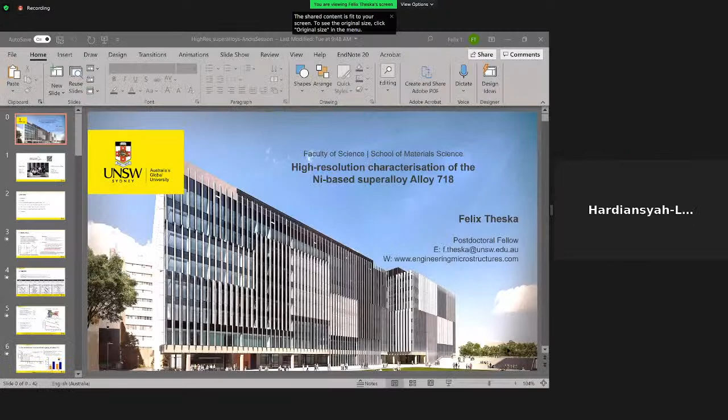Thank you very much for the introduction. Let me just maximize these slides. I hope everyone can see the right view. Yes. Great, thank you very much. At this point, I also want to thank Andy Sohandy and Dr. Annie Sugiarti, who invited me and organized this talk. I very much appreciate this.

My slides are about the high-resolution characterization of the nickel-based superalloy alloy 718. That's pretty much an overview of the work I used to do here at the University of New South Wales in Sydney as part of the engineering microstructures group of Dr. Sophie Primig. We're working on one hand side with superalloys, so I'm part of this research group where we look into alloy 718, Rene 41 and Udimet alloys.

On the other hand side, we're working on additive manufacturing of titanium alloys, also superalloys in different grades of steels. I want to start with a motivation slide, give a brief outline, followed by sections 3 to 6, which are basically 4 papers that came out of my research studies. So these results have been published, and if anyone wants to look them up, you can find them online later, and then close the presentation with a summary slide to wrap it up.

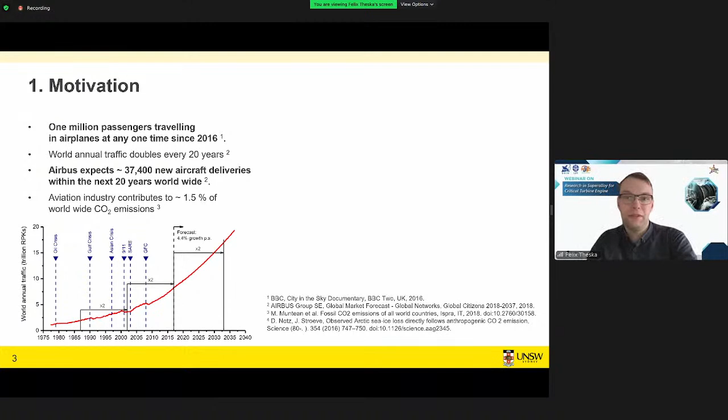At the current time, the aviation industry contributes about 1.5% of worldwide carbon dioxide emissions, and this comes with challenges. For example, new records have been broken with aircraft range, but we don't want to travel equally longer, so airplanes need to fly faster.

The sector relies heavily on fossil fuels, which are very limited, so we need to deal more efficiently with them. And as we emit carbon dioxide, sea ice is usually lost, so there have been studies on that as well.

There are a few approaches to tackle these challenges. One would be to make the aircraft lighter using lighter materials, but we also need to create more efficient aircraft engines, and we can go the way of developing completely new alloys.

But because these are aircraft materials, they need very long accreditation processes. If we start a new alloy this year, it would take up to 10 or 15 years until it can be used.

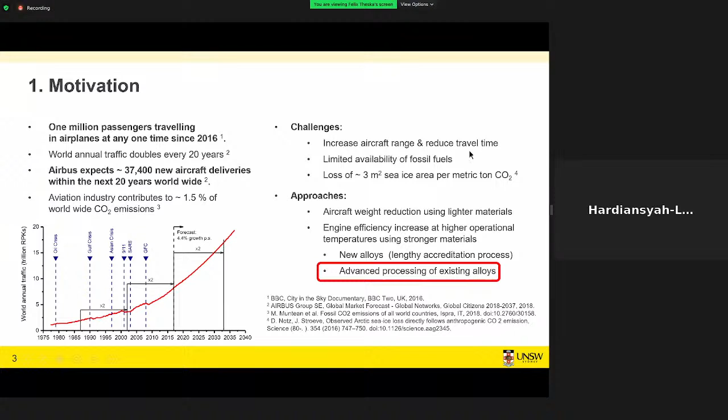A more streamlined approach would be the advanced processing of existing alloys that are already well established, such as alloy 718. That's a polycrystalline and precipitation hardened nickel-iron based superalloy, found in the turbine discs, in the high pressure and low pressure sections of aircraft engines or even gas turbines.

Looking into the microstructure of this alloy, you find a face-centered cubic gamma matrix. We find delta phase platelets that are rich in niobium, usually a couple of micrometers in size, so fairly large, decorating the grain boundaries. Most importantly, we find two types of nanometer size precipitates: gamma prime, rich in aluminium and titanium, and gamma double prime, rich in niobium. The gamma double prime precipitates contribute a major part of the strength for this alloy.

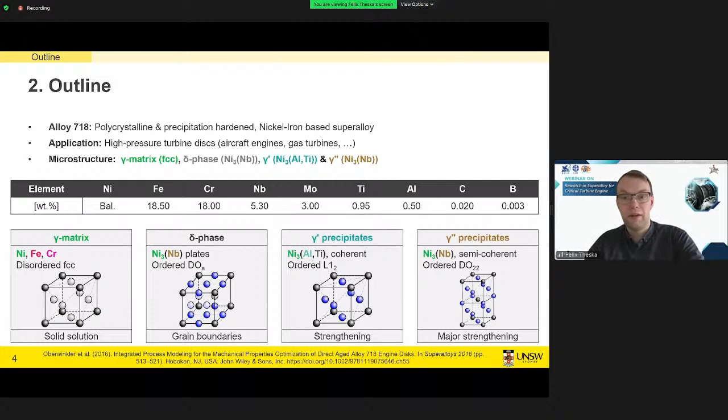We have the intrinsic yield strength, we get some grain boundary strengthening from the Hall-Petch relationship, we get some solid solution strengthening and work hardening, but most importantly precipitation strengthening, which contributes about 44% of the yield strength.

To narrow it down further, my work was mostly on direct aging of this alloy, and there have been some previous studies. This process is not completely new. What's been shown is that the yield strength can be increased by 10% just through using this different process, while having equivalent creep and low cycle fatigue resistance, so there are no major trade-offs when using this process.

What we also know already is that the delta phase volume fraction is lower and we have a higher dislocation density. When we look at the temperature range of conventionally high strength 718 compared to direct aging of 718, we find quite a major improvement.

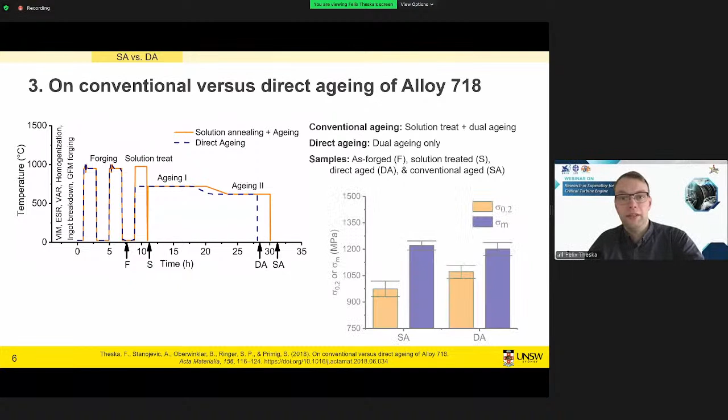Great news, we could actually reproduce this increase in yield strength as well as ultimate tensile strength. But if we also look at this time-temperature schedule, we see the overall process is shorter and makes the manufacturing of turbine discs more economical.

Starting with the grain size, I used EBSD and electron microscopy to have a look at it, and we see that after direct aging, the grain size remains very small, whereas after conventional aging, we find some selective grain growth occurring here and there.

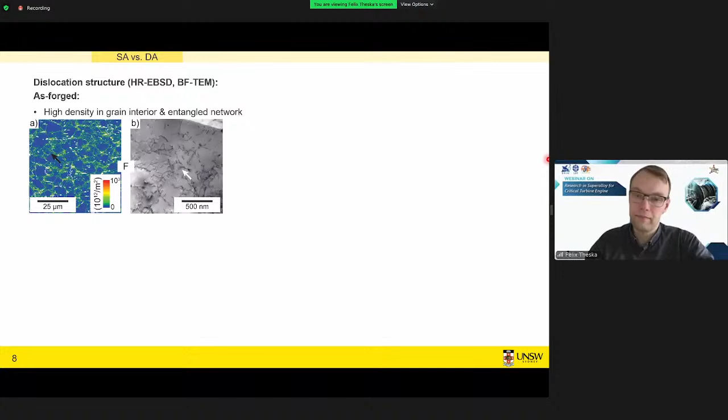What's difficult with the TEM is to distinguish between these two types of precipitates, gamma prime and gamma double prime. Here the Atom Probe helps us a great deal, because we can separate them based on their individual chemistries.

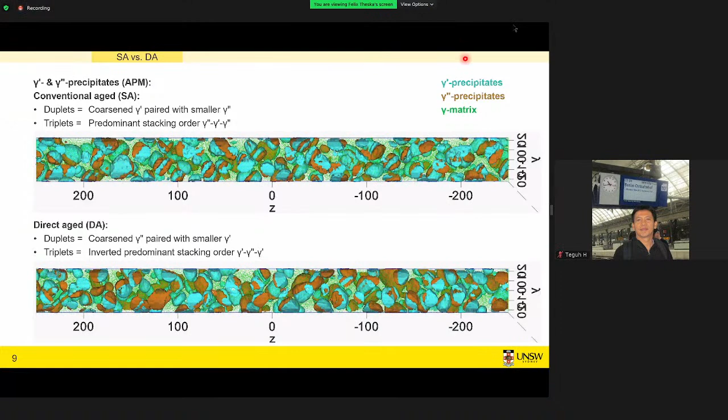If I move on the top hand side, we see a conventionally processed alloy, which is solution treated and aged. As we let it rotate, we see that these 2-nanometer scaled particles actually occur together, so we see a gamma prime and gamma double prime sit together.

And if we look in more detail at, for example, the duplets and triplets, we find that gamma prime likes to sit in the center of these particles, or forms the larger part.

On the other side, the direct age material looks very similar. Again, we find these particles sitting together, but if we look closer in more detail, we find that now gamma double prime likes to sit in the center, or forms the larger part of these particles.

The highlights should pop up. Yeah, as you can see here, these triplets, and here the duplets.

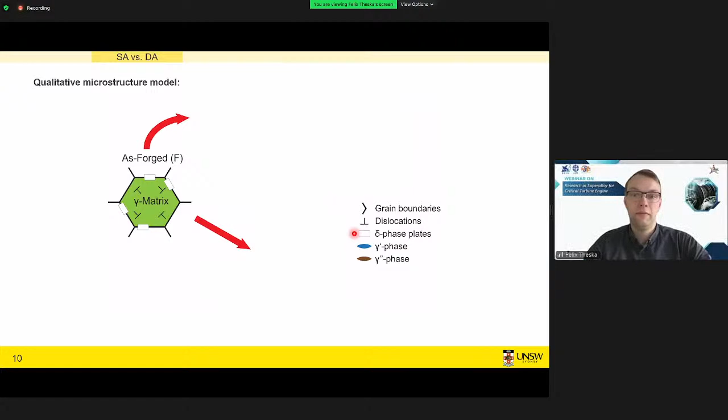Okay, now we already have some insights that this different processing actually changes the structure of these precipitates, and we can summarize what we found out in this sketch of a microstructural model, where we start in the as-forged condition, where the matrix contains high dislocation density and very little delta phase.

If we do a solution treatment to the material, we increase the delta phase, which is rich in niobium, so it takes niobium from the gamma matrix, but we also annihilate some dislocations. This condition favors the gamma prime precipitation, where we find it as the center particle or the larger particle.

On the other hand, during direct aging, we retain the high dislocation density and a lot of niobium in the matrix, which favors the gamma double prime precipitation. So we find this phase as the center particle or the larger particle.

If we combine this together with the smaller grain size, a higher dislocation density, more niobium in solid solution, plus these changed co-precipitates, we find there are contributions to this increased yield strength from all four factors.

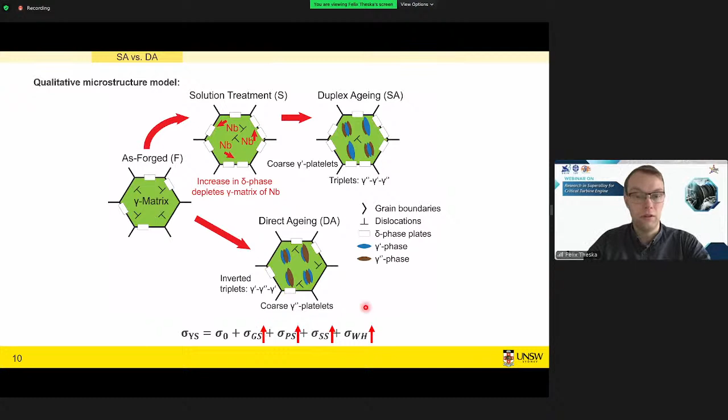Okay, so the next part will be about the Atom Probe microscopy, how we get more quantitative results. I just want to use this as a short introduction to the method, just to touch base with everyone, so that we know the fundamentals of how it works.

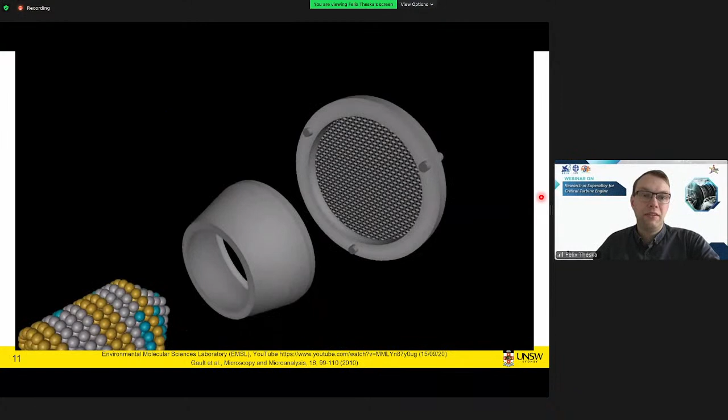So in this nice animation, we see we need a very sharp needle-shaped specimen, which is placed in front of an ion lens or local electrode. After this local electrode, we have a 2D detector. Then we can detach individual atoms by laser or voltage pulsing, and these atoms are ionized and then accelerated towards the detector screen.

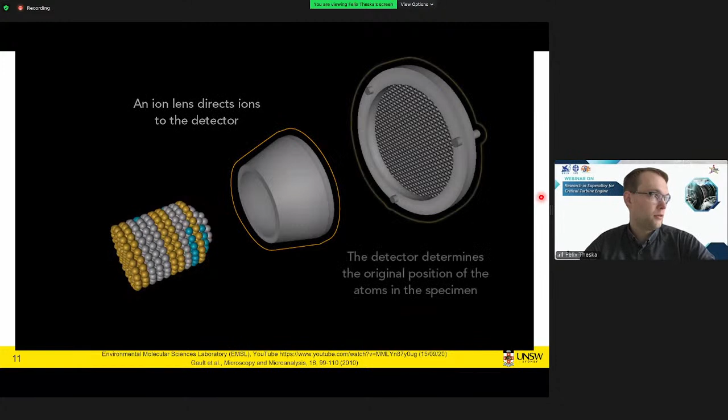So from this, we will get a two-dimensional map, X and Y, where our ions used to sit in the material. And if we record the ion sequence, basically where does the first or the 100th atom sit, we can also reconstruct the Z coordinate.

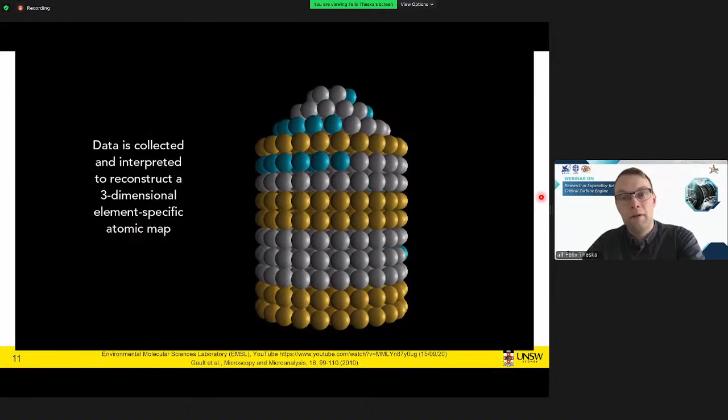Now you can see, because we pulse and then we can measure the time of flight, we also have a mass spectrum in the Atom Probe, which is very convenient because not only do we get the X, Y, and Z coordinates, but also the type of element where it used to sit. And then we get these very nice three-dimensional atom maps.

Okay, so this is just a sketch of what we just have seen in case the animation wouldn't work. How we get these very sharp needle samples...

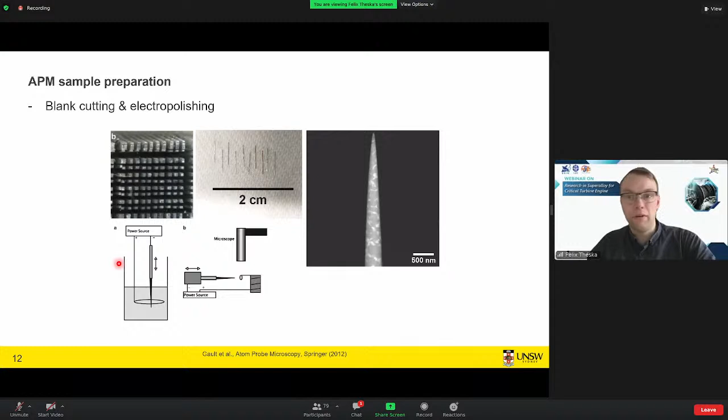...is quite well established. For example, for these bulk samples, we would start slicing them and then cutting them into smaller rods, as you can see on the left-hand side, and then electropolishing them, such as on the bottom side. That's done with these rods placed through a micro loop with an electrolyte. And if we electropolish long enough, they will approach a tip shape, which is indeed very sharp, as you can see in this SEM image.

Okay. Now I said we get the X, Y, and Z coordinates, but the coordinates we record are not necessarily the actual coordinates. So there's a fair bit of reconstruction necessary to get to the true coordinates, or as close as possible.

And the two main reconstruction parameters: on one hand, the image compression factor. For example, if we know features in our data set, in their location, such as some crystallographic information, and they do not overlay with the actually observed location, we can correct this. And that's just done by this rather simple ratio.

On the other hand, we have the so-called field reduction factor. And that's a bit more complicated because it depends on the specimen geometry and the resulting electric field. Often the exact specimen geometry is not known, so we can only approach this factor as close as possible. But that's then calculated from the voltage, the tip radius approximation, and the measured electric field.

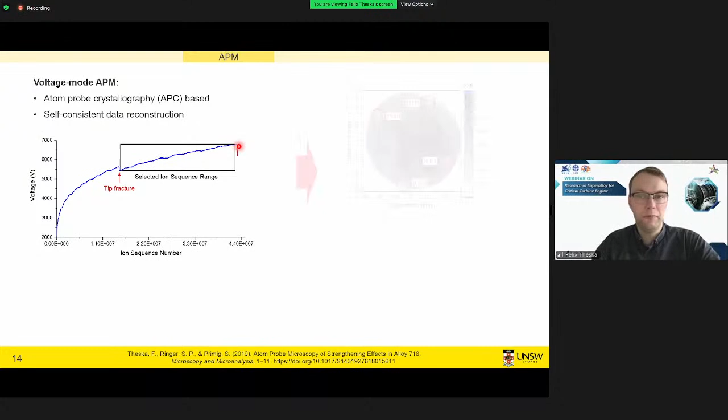So we avoid any tip fracture and then have a look what the detector has seen. Remember, that's this two-dimensional detector, and we see there's some regions that give us less signal. Sometimes that can be crystallographic regions, like in this case.

We then have a look at the mass spectrum and can assign each peak an element. Once we have calibrated these reconstructions, we get these very nice 3D element maps.

Okay, so that's quite nice for the voltage Atom Probe microscopy, but the problem is here we usually need a quite high voltage, which means there's a high risk of fracturing our sample. And when the tip fractures, the experiment is over, and that's all the data we get. We need to make a new sample.

If we want to quantify these precipitates, we need relatively large volumes so we get some good particle statistics. And here we can use laser Atom Probe microscopy, where instead of voltage pulsing, we pulse a laser, which requires a lower voltage and therefore less risk of tip fracture.

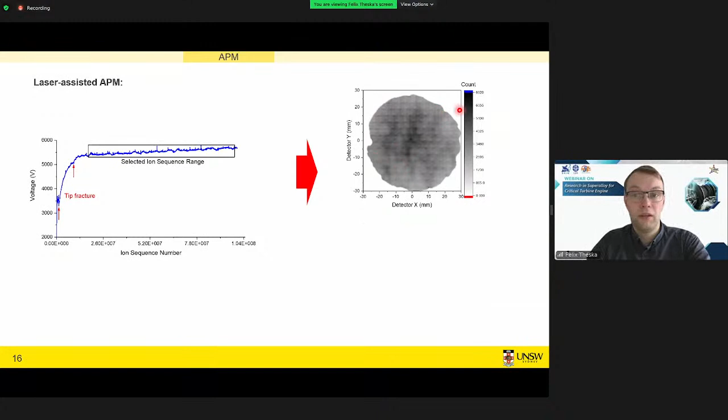So again, we see a voltage curve like this, we get more ions. But if we look at the detector map, we see that these crystallographic features have disappeared. That's quite typical for this. The mass spectrum has changed a little as well, but we still can assign all our elements without any problems.

But we still don't know what are our correct reconstruction parameters. So we need to find a way to do this.

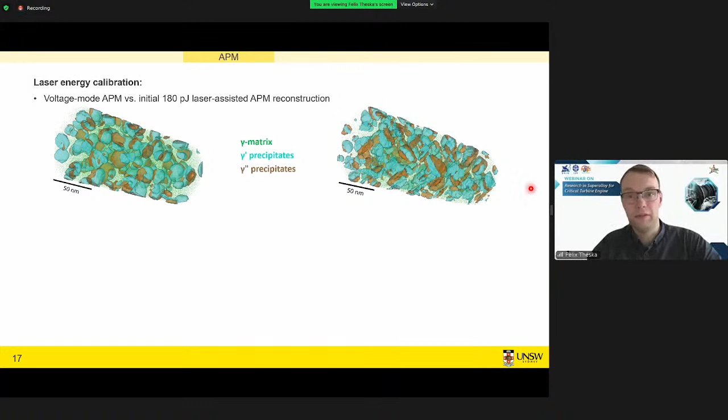Just a short slide on the laser energy. We cannot use any type of laser energy. As you see on the left-hand side, a voltage mode, and on the right-hand side, a very high laser energy. If we go too far with the laser, we may even distort the resulting data, which is then not useful anymore. What we did here was look at the mass resolution and different charge states to calibrate the laser energy, and then could use 50 picojoules for this material and this microscope design.

Let's move on to the reconstruction parameter calibration. This slide shows basically how we use the precipitate morphology. We start with a voltage mode data set where we can see these gamma prime, gamma double prime precipitates. They have a certain shape, extent in X, Y, and Z. Then we can give the relative spatial extent of X, Y, and Z to each other. And as we play around with the reconstruction parameters, we see that we can either stretch or compress these particles.

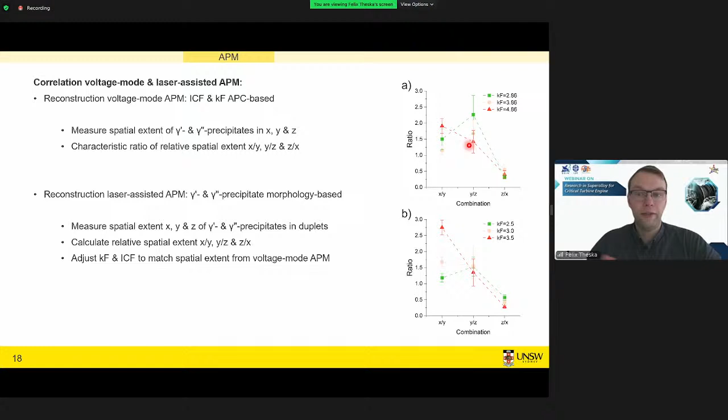And because it's the voltage mode calibrated data, we know what is the correct shape of these particles. Now we can take our laser-assisted data and do the same. We play around with the reconstruction parameters until our relative particle shape fits that of the voltage mode. In this case, I put some red boxes here for the appropriate reconstruction parameters, and you see these relative sizes of the particles are very similar to each other.

Now we have reconstructed our data. The next challenge is how do we represent these particles? Because what we see is usually just points of each atom. What we see here in these brown and turquoise surfaces are so-called isosurfaces.

And basically we can do with them whatever we want. We can set them to, for example, 10 atomic percent niobium. Anything above this value will be enclosed by this surface. But how do we know that this value is correct? Because if we make it larger or smaller, we can also make the particles appear larger and smaller, which is of course difficult if we want to have an accurate size of them.

What we can start with is we look at fully captured particles, such as here. We just chose a random isosurface. We just want to know where are these particles. So we plot them here, and then we put a region of interest. This is a cylinder which goes right through the duplet particle. And then we can plot a concentration profile.

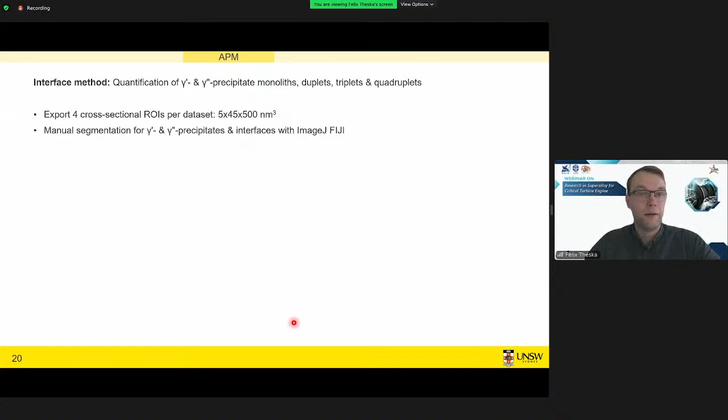So we have reconstructed our data. We now can represent these particles reliably, now we can start doing some quantitative analysis of these atom probe data. For example, in this figure A, we see the side view of a three-dimensional data set, and that's quite difficult to analyze if we want to know how these co-precipitates are stacked together.

What we can do to make it a bit more simple is take some cross sections. We just cut a slice out of our data and then start segmenting what's gamma prime, what's gamma double prime. So we get a much simpler map as in figure B. Once we've done this, we can start counting what are single particles or monoliths, what are duplet particles where two sit together, what are triplet particles or even quadruplet particles.

And once we're done with this counting, we can compare them. You see in these different colors, we have these different morphologies sitting together. What we have observed before is basically represented here again, where SA represents our conventional processing, where we have much more of these triplets with gamma prime as the center, and DA, after direct aging, we actually do have more triplets with gamma double prime in the center.

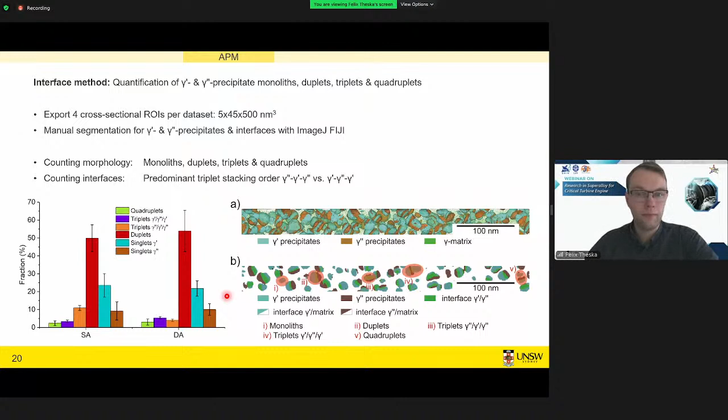Now that we have developed a toolbox to analyze these particles, we can apply this to look into actual turbine disks. What you see here is a result for the cross section of a turbine—a slice taken out of a turbine disk.

If we focus on this middle section, we find some yield strength anomalies, mostly in this middle region where it's very low. We can reproduce this with hardness mapping—I used Vickers hardness 10 in this case.

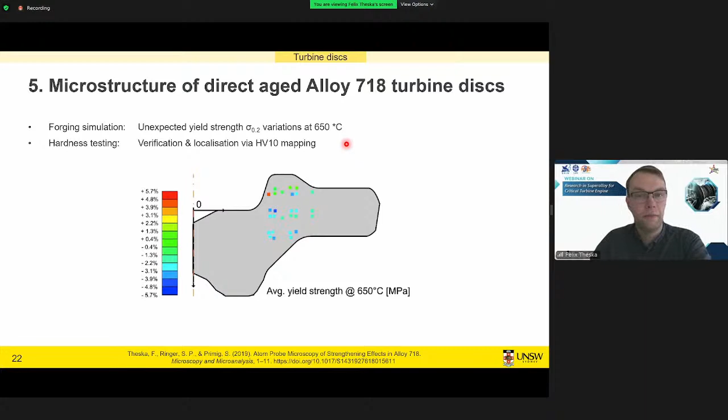Looking at the macro-etched images, we find elongated grain flow in the high hardness region and curved grain flow in the low hardness region. Taking these samples into the light optical microscope, the low hardness region also shows larger grain size in some areas. Using the electron microscope with EBSD, we confirm this larger grain size.

However, this grain size difference is not enough to account for the observed differences in strength, so there must be more going on. The delta phase fraction is already low because these are directly aged turbine disks, but in the low hardness regions we find even lower delta phase fractions, looking at these bright platelets.

In addition, we can plot our geometrically necessary dislocations again, and we find that these larger grains contain much less dislocations.

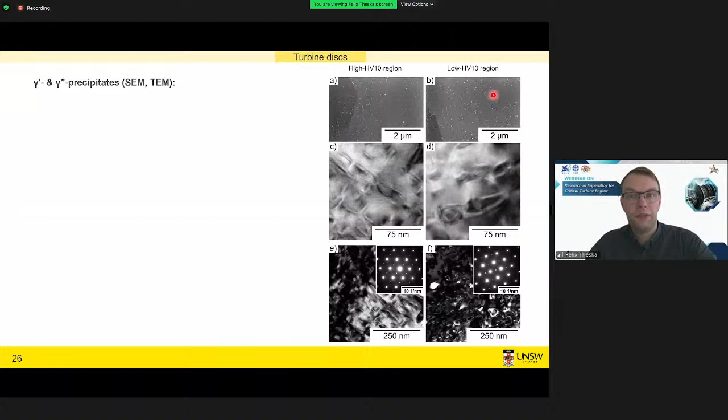If we go to higher resolution techniques, we can use the SEM, set it up carefully, and find the precipitate structures. But it's easier with the TEM to find differences, because we see in both the bright field and dark field that there seems to be a lower density of these precipitates in the low hardness region, whereas precipitates in the high hardness region are quite densely arranged.

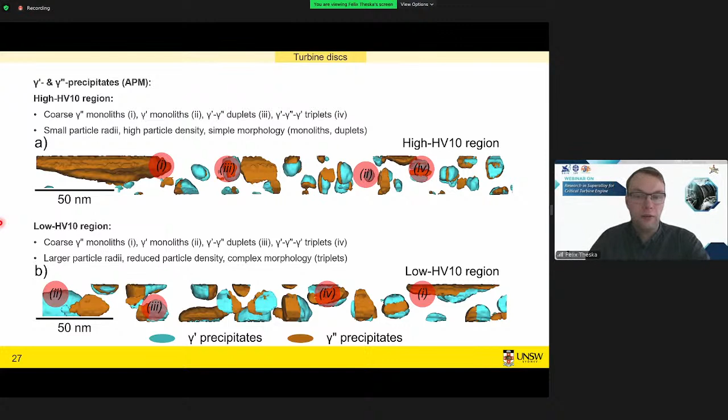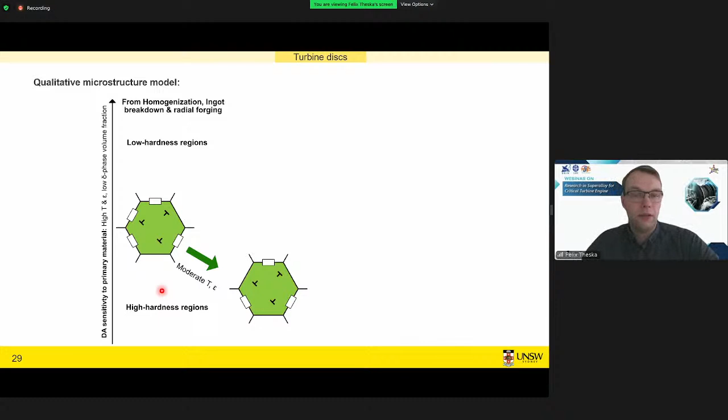These turbine disks are really complex, so the local temperature and local strain induced can vary significantly. In this case, the high hardness region experienced a moderate temperature as well as a moderate strain, so not much has changed in this case.

We retain the high dislocation density and the delta phase volume fraction, which is in favor of a very fine distribution of our precipitates. I call this a stable direct aging in this case.

Now our low hardness regions correlate with a high temperature and high strain. What this can do is actually dissolve some of the delta phase, which would result in a lower volume fraction. But if the delta phase is dissolved, this means we have more niobium in solid solution and less dislocations as well.

So we have this grain growth occurring, more niobium, less dislocations. And that's in favor of more widely spread precipitation. I call this unstable direct aging for the reason that there's less nucleation sites and the growth is very much accelerated due to more niobium.

All right, now to the last chapter, where we can use all this knowledge we have acquired before to study the early stages of precipitation during direct aging in this alloy.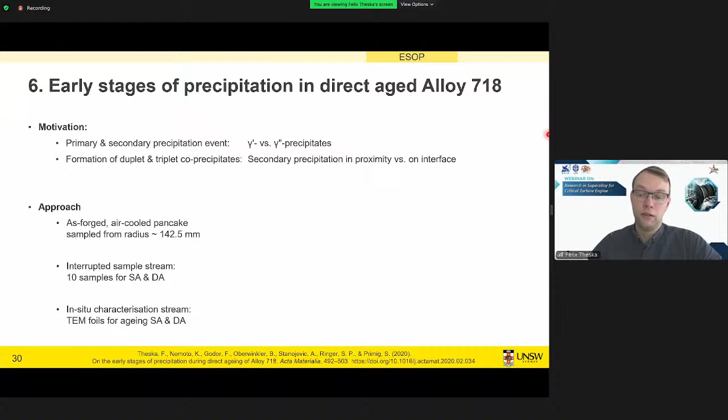In our approach, we took the same material from an industrial forged, not disc, but an industrially forged material that has been air-cooled, and then created an interrupted direct aging sample stream.

What we can do with these samples once we have heat treated them is do some hardness testing. As you see here, over the direct aging time, the hardness profile roughly fits to an exponential growth function. We do see some outliers after 2 hours, then in the transition, as well as in Ageing II.

But to really understand how these initial stages of the precipitates form, we selected these samples highlighted by the black arrows: the as-forged, 0.2 hours, 0.6 hours direct aged, and then fully aged.

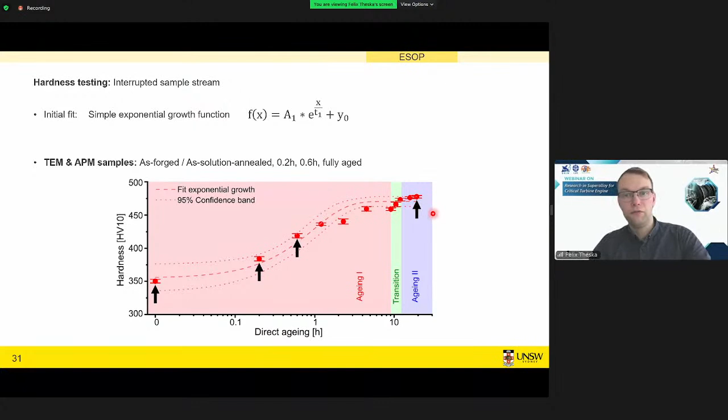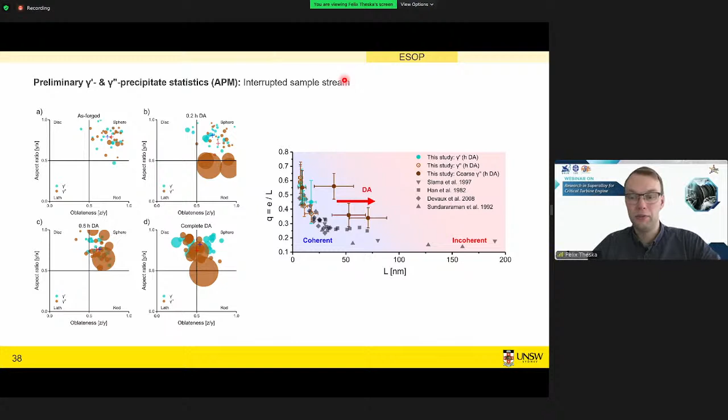Now we can adapt our microstructural model even further. We start with the air cooling after the forging, where along these dislocations we have a high attraction of niobium, whereas aluminum and titanium, in this study, we have not observed a similar trend. So at least for niobium, the diffusivity along dislocations seems to be greatly accelerated.

What this means is we have these gamma double prime particles forming along the dislocations and then growing quite rapidly, whereas the population of smaller particles, they grow much slower within the matrix.

After 36 minutes of aging, all populations start growing, and during the time from 0.6 hours direct aging until the final aging step, we observe this formation of co-precipitates.

If we consider the change of the chemistry, we see that gamma double prime takes niobium from the matrix, but gives back aluminum and titanium. And this favors the precipitation of gamma prime on the interface of the gamma double prime particles.

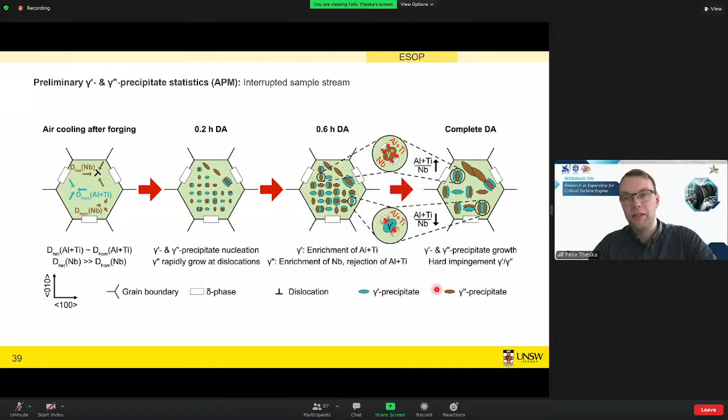Now let me move on to the summary, just to wrap up what we have observed. In the first study, we have observed the interaction between the delta phase and gamma double prime precipitates through the niobium concentration. We also have observed that the dislocation density plays a very important role.

With our Atom Probe microscopy toolbox, we could find ways to calibrate large data sets and quantify our co-precipitate morphologies, which we then can use to quantify data in turbine disks. These are incredibly complex because we have a lot of factors during the manufacturing in the microstructure playing together.

But we can also quantify our early stages of precipitation, where we have observed homogeneous and heterogeneous nucleation. And we found that the secondary nucleation is favored by the change of the local chemistry.

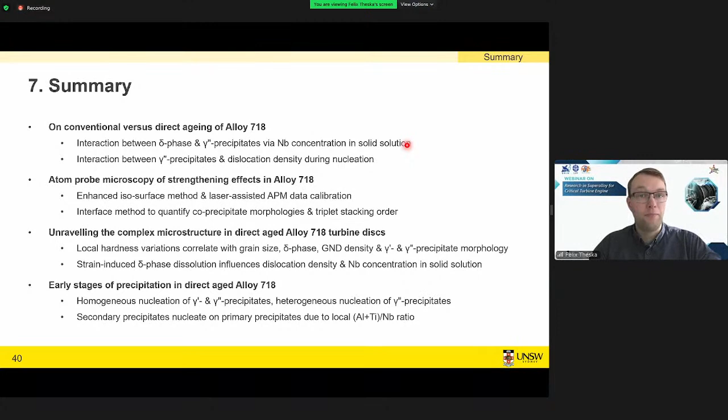So that's been my work in our group.

Last but not least, I want to thank Microscopy Australia, our friends at Sydney Uni, and our industry partner, voestalpine. They need to be acknowledged as well for their expertise and the material they provided. I thank you for your attention, and I'm happy to take any questions.

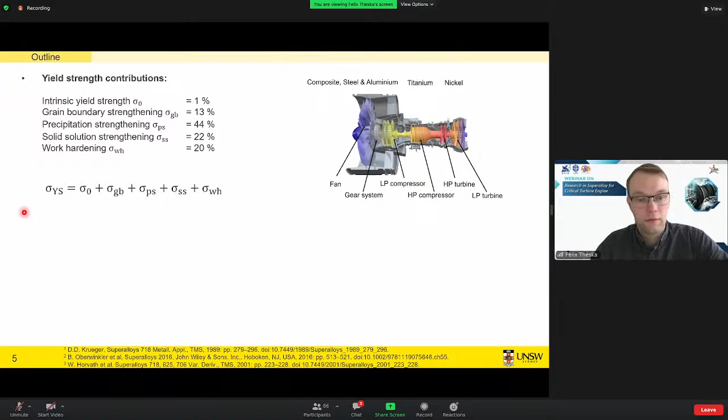I was about to ask you what is the volume fraction between this L12 structure and then DO22. And in the last few slides, you showed that after heat treatment, let's say after the early stage and then after 10 hours, the volume fraction changed quite considerably, in which the volume fraction of DO22 is much larger.

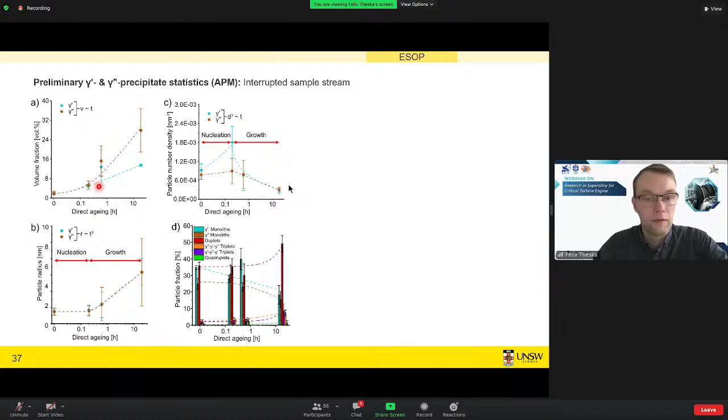So does it mean if you prolong this material for long heat treatment, like 1000 hours in service, the volume fraction will change?

Also, DO22 is much higher than L12 structure? So does it mean that DO22 is more stable than L12 structure? So the second question, I would like to know if there is a mechanism of transition from L12 structure to DO22, some transition of the structure from L12 to DO22.

And then the last question, maybe, the atomic composition of the niobium is quite small, so how can we have this much DO22 volume fraction? If you remove this niobium, like half or even totally remove niobium, what will the mechanical properties of this material be? So you can only have L12 structure without any DO22 or delta phase, which, I saw from the presentation, the main constitution is niobium.

Okay, that's all. Thank you so much.

Sure, please remind me if I miss any part of the questions. So the first one is the stability of the DO22, which is the gamma double prime. Yes, gamma double prime, and that's actually less stable than the L12. It provides a lot of strength for temperatures up to 650, 700 degrees centigrade.

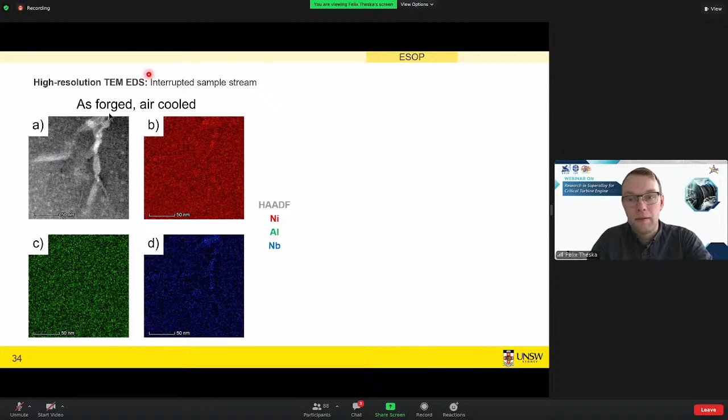You showed us slide number 34. Could you show it to us again? You mentioned that's a high resolution TEM image, right? And you can get the atomic, nanoscale structure. So I'm just curious, you set the G factor by the TEM, right? In this case, the direction of the diffraction patterns in B and D for the gamma prime, is it...

It shows the difference between as-forged and direct aging in a very short time, only 0.6 hours. But if you also see the precipitations and dislocation density, in the next slide perhaps the structure is also similar. Does that mean the direct aging, because of the very short time... And how did you prepare the samples? I'm worried that if you prepare by FIB, there could be contamination that affects the precipitation in your structure.

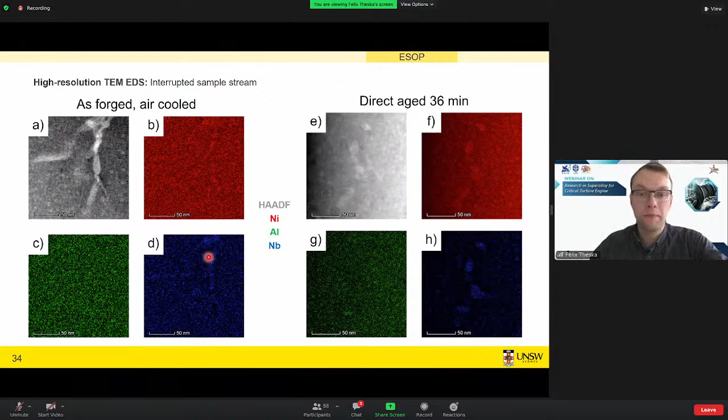Yes, so maybe I'll start with sample preparation, because that was one of our concerns too. All these atom probe samples and TEM samples have been electropolished. You grind a very thin foil, make it a disc, and then electropolish it, so you have no contamination from the FIB and no deformation left over from any grinding steps. The challenge is getting samples suitable for this high resolution TEM. It took me a bunch of attempts to get a very, very thin sample, so you need a couple of attempts to get good enough samples.

The first question, I think I missed the first part. That's because I saw the structure is quite similar, right, as the forged and direct aging only in 0.6 hours. Is that because of the very short time? Because the G factor, if we see in the diffraction pattern in figure B and D, this is also similar. Yes.

So what we can show here is that we indeed already have precipitates in the as-forged condition, which then grow very quickly. Because if we just look at the atom probe, it might be just some accumulation of niobium, which might not be ordered, which wouldn't be a precipitate. But here we can show they are already ordered like they are later, after 0.6 hours, which makes them precipitating particles.

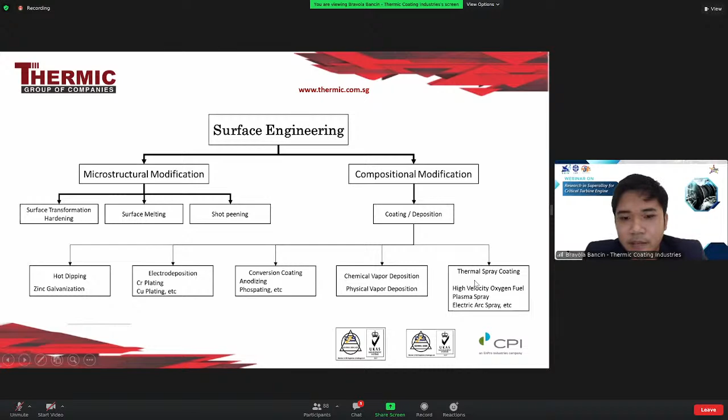And then what is thermal spraying? Thermal spraying is a group of coating processes in which material is deposited onto a variety of components. This is the material, the feedstock. The form can be wire, powder, or rod, and the type of material can be ceramics, metal, alloys, carbides, and many others. The material gets heated by electrical means or by combustion, and then the gas will spray the melted material onto the surface to be coated.

That's the principle of thermal spraying. These are microstructure examples of the thermal spraying process. This is a cold process with virtually no heat input to the substrate, a mechanical bonding process. It's just mechanical, not metallurgical like welding.

We can spray many materials, and the thickness is typically 100 to 750 microns, but can be more.

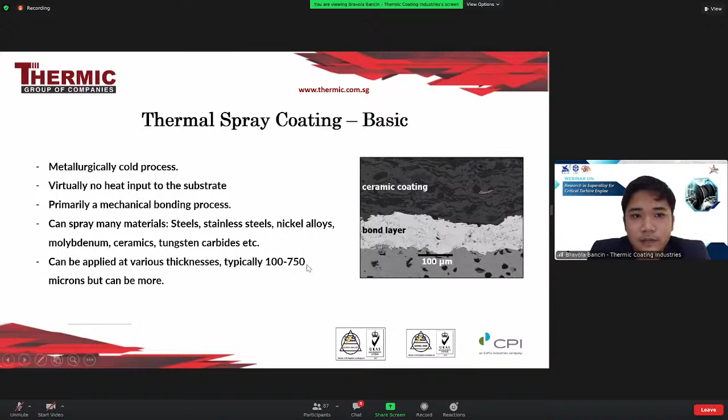This is the thermal spray coating advantage: it provides resistance to wear, erosion, cavitation, corrosion against corrosion under insulation, and abrasion or heat, and many more that can extend the life of new components.

This process coats the material so it can improve or restore worn components like this blade. We can extend the life of the blade.

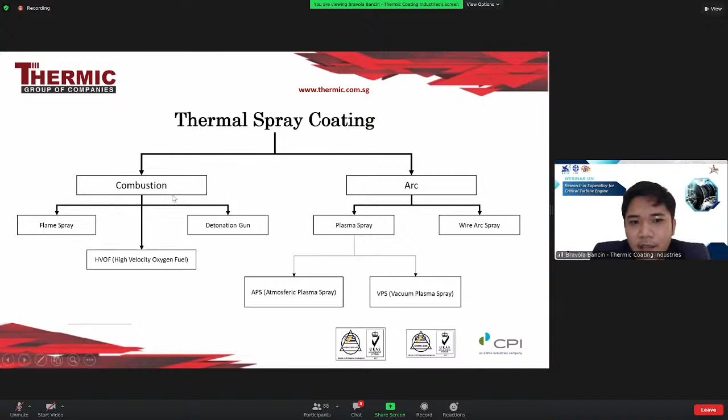This is HVOF coating. What is HVOF? HVOF is high velocity oxygen fuel. We can see this is the principle of the HVOF process.

Oxygen, fuel gas - HVOF can use liquid fuel or gas. In our workshop we use propane in the form of gas. The spray motion of HVOF, high velocity oxygen fuel, is very supersonic speed. In the motion, diamond shock waves can form because of the resonance of spraying speed onto the component, the workpiece.

This is a kind of feed material for HVOF using powder, very, very fine powder.

This is some materials that can be applied by HVOF coating. We can see here nickel-based superalloy powder similar to Inconel alloys like Inconel 625, Inconel 718, and similar to Rene 80. The powder size is typically around 5 to 60 micrometers with spheroidal morphology. Another material is tungsten carbide. These two kinds of material are commonly used in our workshop, very common to be applied to our customer parts.

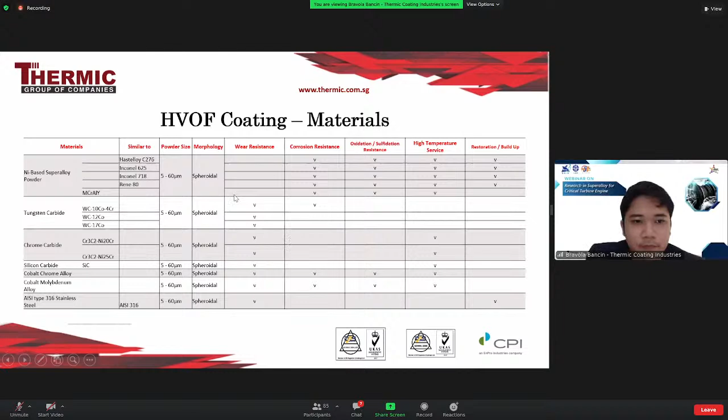The powder is deposited to the substrate, and the particle velocity is up to 700 meters per second, more than the speed of sound. And the bond strength of HVOF is the highest

The coating thickness typically for HVOF is up to 2.5 millimeters, but sometimes we just apply the HVOF in our workshop up to 500 microns because it is enough for the parts component.

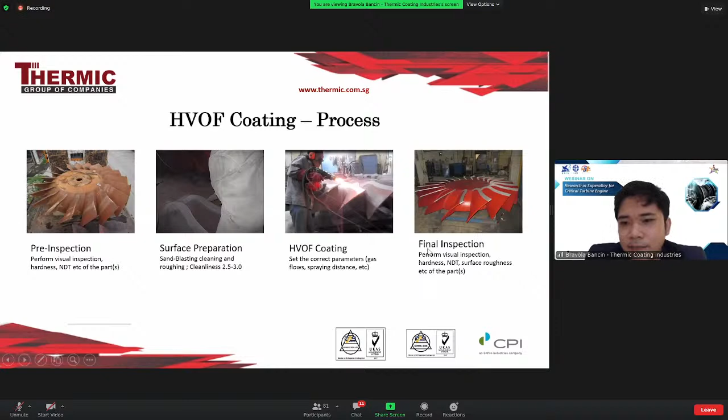HVOF coating on turbine blades - almost 50% of turbine blade failures are related to fatigue, stress corrosion cracking, and corrosion fatigue. Once a crack is initiated on the blade surface, it grows rapidly and causes blade failure.

So it needs to be coated to improve or extend the life of the blade. Why must it be HVOF? HVOF produces a coating with higher bond quality, higher hardness, lower porosity, and much better corrosion resistance. The coated turbine material, like superalloys, gives more corrosion resistance and reduces degradation. We saw before from the table that HVOF is better than other processes for the blades.

Here is the coating facility in our workshop. We have the HVOF machine and the ABB IRB robotic arm. We often use this robot to help with the spraying so it can be stable, giving good enough spray quality.

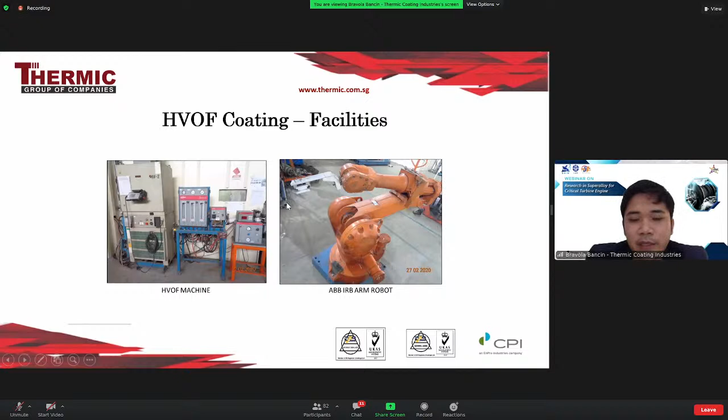Okay, this is the picture before. We do the coating repair for a rotary fan coal steam turbine. This is before the HVOF coating process. You can see here it is very damaged, because the fly ash contains a silica compound, and the silica impacts the blades. So we rebuild it, then do the HVOF coating process.

After the HVOF coating process, we do dynamic balancing, which is mandatory because these are rotary components and they need dynamic balancing. And this is the finished result. We also did training and supervision for the same type of part in Vietnam, collaborating with VIVA Blast.

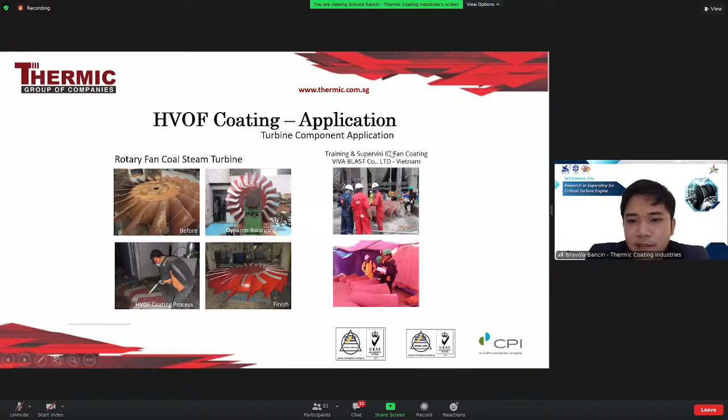There are other applications of HVOF coating besides turbine blades - sleeves, bearings, piston compressors, shaft pumps, shaft mandrels, rotors, and ball valves. This is our specialization in the workshop: ball valves. We have a CNC machine to make sure the roundness of the ball valve is perfect.

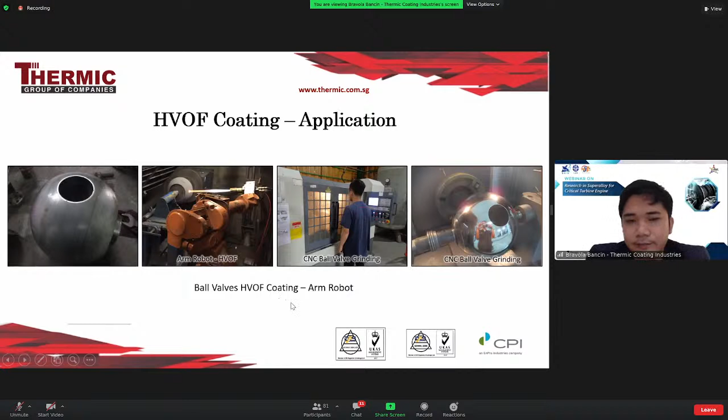Okay, this is another thermal spray coating application. It can be applied in HVOF coating gate valves.

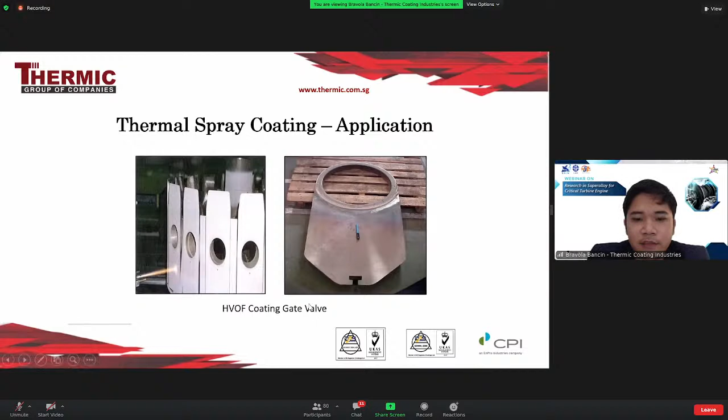Thermal spray coating is commonly applied as TSA, thermal spray aluminum, to storage tanks, pipes, and vessel tanks, for corrosion protection and protection against corrosion under insulation. This is an on-site application of TSA.

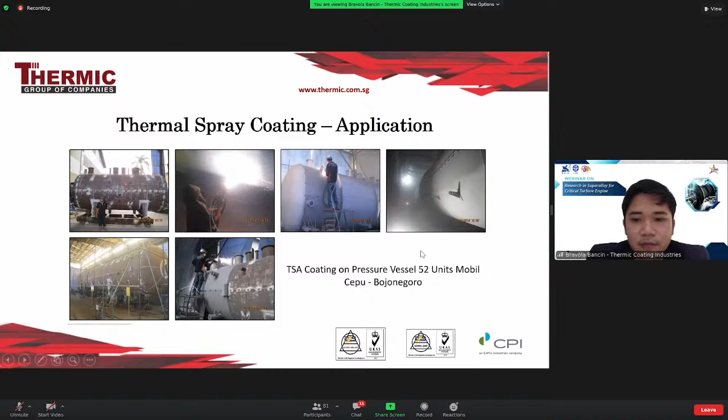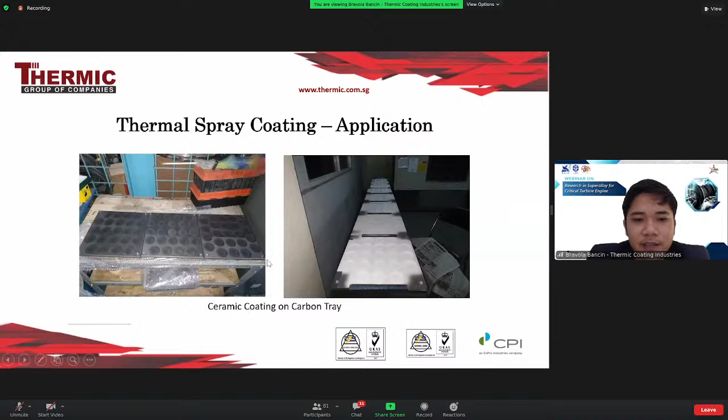This is ceramic coating for carbon tray, which can improve and extend the lifetime of this carbon tray, because sometimes the part produced sticks to this carbon. It is abradable, and the product is abradable.

We can cooperate to improve durability and reliability. We can apply on rotor turbines, blades, ball valves, sleeve bushings, rolls and screws, wall tube boilers, ID fan, and ducting, and many more.

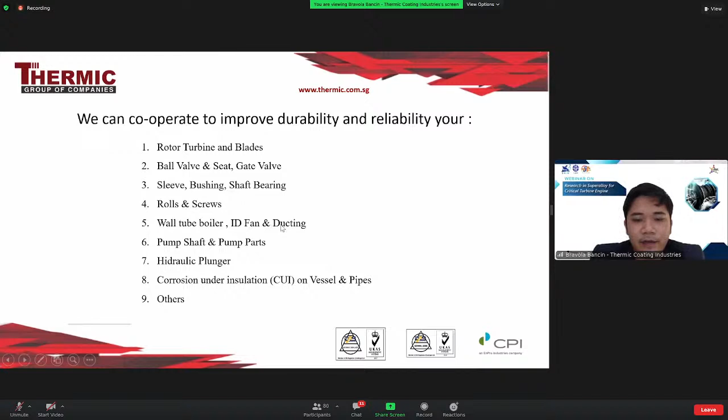That is maybe my presentation to be shared with all of us. We are the applicant from Thermic Coating Industries, doing coating for turbine blades and other parts too. Maybe this is the knowledge I can share, and I would be happy if there are any questions to discuss. Thank you.

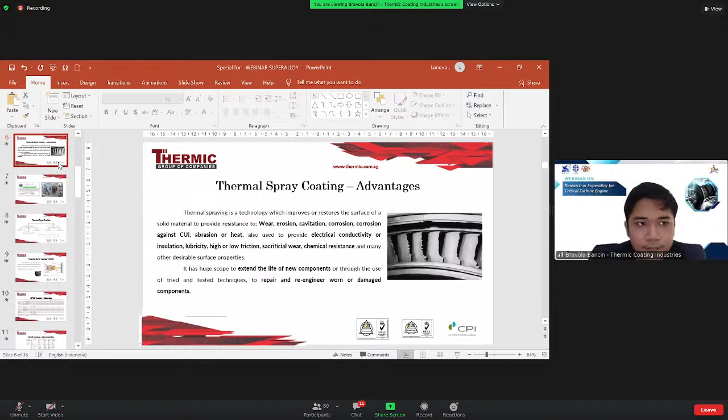Already a question from Mr. Halashon. Maybe you can ask directly, Mr. Halashon. Hello. Yes, hello. Is it my voice okay? Okay, maybe I can help you by reading the question, because your voice is not clear. Can I?

Okay, so here the question is: we can conclude that coating type can increase all characteristics, as example hardness, density, etc. Am I right? And may I know how many times this has been done and in which turbine?

Okay, I will ask the question from Mr. Halashon. Mr. Halashon. Hello. Yes. Sorry, the voice is not clear.

Yes, the process can increase all the characteristics of the components, for example hardness, density, etc. It depends on the material applied on the components. And may I know how many times this has been done and in which turbine?

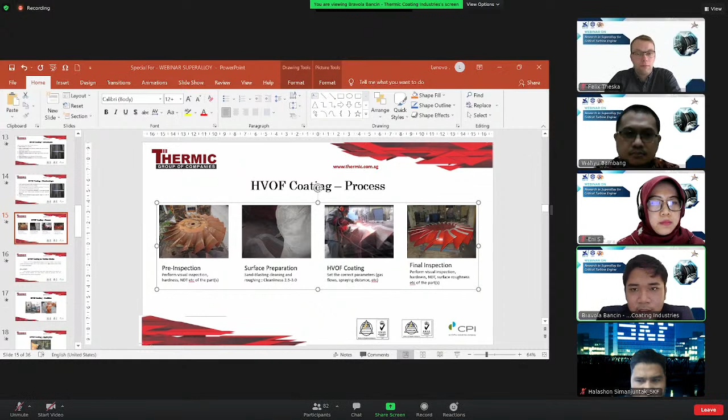How long do you take the process of coating in one turbine? Excuse me, Mr. Halashon, your voice is not clear, can you repeat your question? How long do you take the process of coating in one turbine? Okay.

Maybe I'll stop my camera so the connection can stay stable. Okay, I think I get your question: how long is the process conducted?

For new parts, we can do it in around a week. But for damaged parts, we must pre-inspect first, check what the damage of the turbine is, and then analyze it, and then we can be sure how long it will take until the final inspection. But for new parts, it takes around 5 days or a week. That is for Mr. Halashon.

5 days, or a week until the HVOF coating. But there is another requirement that the rotary part needs dynamic balancing, which is outside of our control, but it could take a week. So the total until it can be used is around 2 weeks for new parts. But from our experience, from 8 parts of ID fan or rotary fan coal, all of them were damaged, and we had to rebuild it, which took a month.

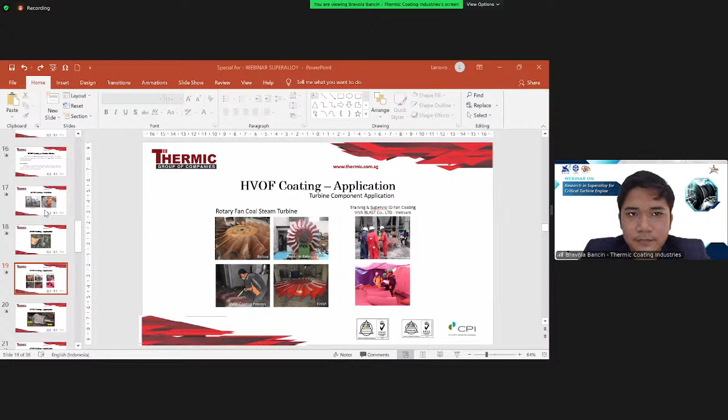You have already presented several techniques for thermal spray, and the interesting thing is that the hard coating is appropriate only for metallic materials, and the shape of the particle or powder coating material should be spherical. For example, in our lab we try to mix coating materials that are not commercial powder, so sometimes if we use ball milling, the powder particle looks like flakes. So if the particle size is not more than 60 micrometers, is it safe for the HVOF gun to deposit our coating materials?

Hello, okay, I'll try to answer. The recommendation for HVOF coating is that the morphology should be spheroidal. If there is another morphology like flakes, it will damage the HVOF gun and the hoses faster, and the burning or heating of the material will not be similar in all particles, but in spheroidal shape the heating is efficient. So in other words, the spheroidal shape is a must, right?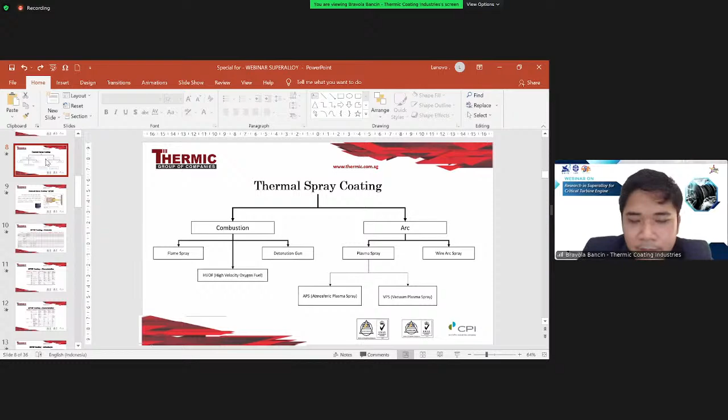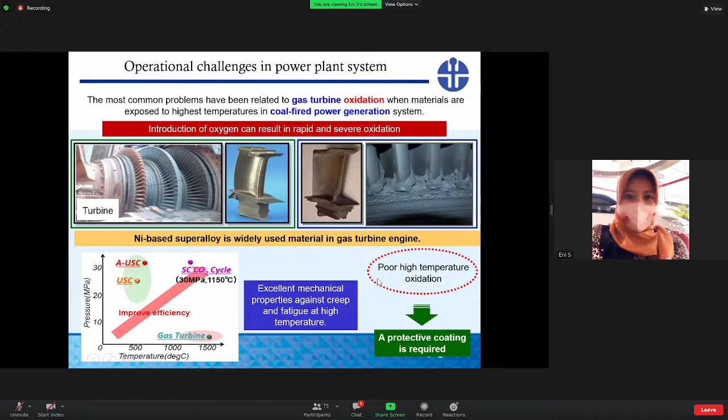There are several methods for depositing thermal barrier coatings, such as thermal spraying, physical vapor deposition, and electron beam physical vapor deposition. However, in the present study, we utilized thermal spray for depositing thermal barrier coatings.

The second layer is the thermally grown oxide, mainly an alumina layer, which grows from 0 to 10 micrometers and acts as a diffusion barrier. The third layer is the ceramic top coat, typically yttria-stabilized zirconia, around 300 micrometers to 1 millimeter in thickness, which acts as the main thermal insulation layer.

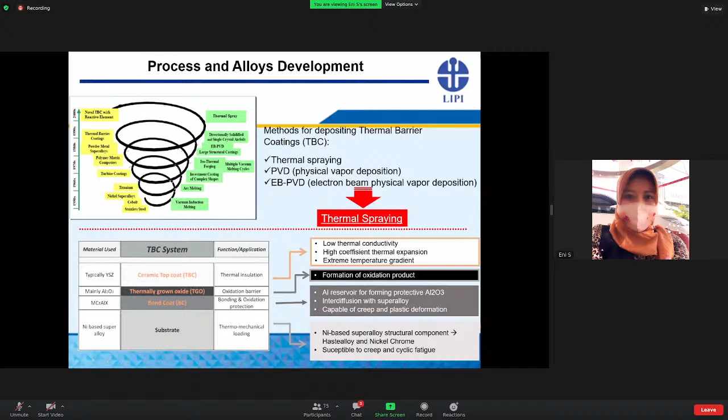For the bond coat ceramic-metallic layer, the material should be an aluminum reservoir for forming a protective alumina oxide scale, and it can also have interdiffusion with the superalloy and be capable of creep and plastic deformation.

Initially, the nickel-chromium-aluminum addition as the bond coat material was deposited using the high velocity oxygen fuel technique, followed by deposition of the ceramic yttria layer. The coated sample was treated in a tubular furnace with a heating rate, in argon for 2 hours, followed by 1100 degrees C for 2 hours.

All of the coating samples were oxidized in air at three different temperatures: 1000, 1050, and 1100 degrees C, for 100 hours in a muffle furnace.

The observation was carried out using XRD for phase analysis and scanning electron microscopy equipped with EDS for microstructure analysis and composition analysis.

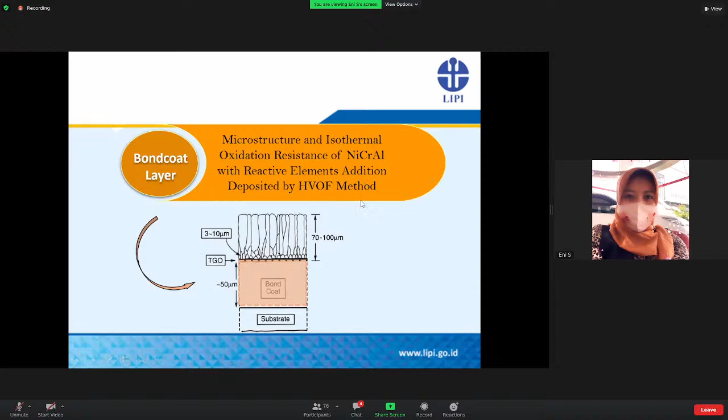In the next slide, I will discuss the results of microstructural analysis and isothermal oxidation resistance of nickel-chromium-aluminum with reactive element addition deposited by the HVOF method.

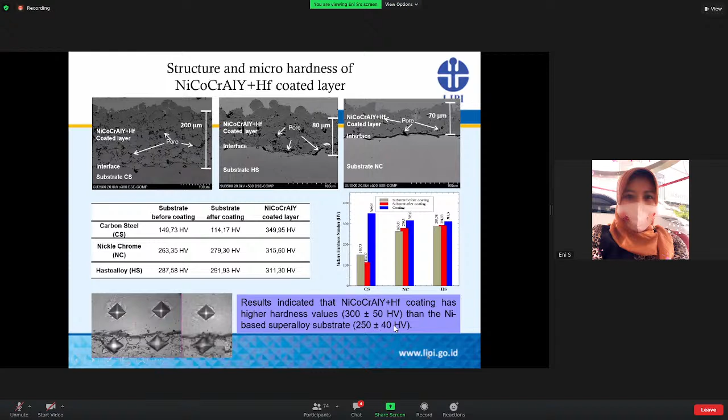An oxidation test was carried out at 1000 degrees C for 200 hours, on heat-treated samples at different temperatures, which are 1000 and 1100 degrees C, with different nickel-based superalloy substrates: nickel chrome and Hastelloy. It shows that heat-treated samples at 1100 were more protective than at 1000 degrees C for the 200-hour oxidation time. Moreover, the performance of the coating layer on the superalloy substrate has the highest oxidation resistance.

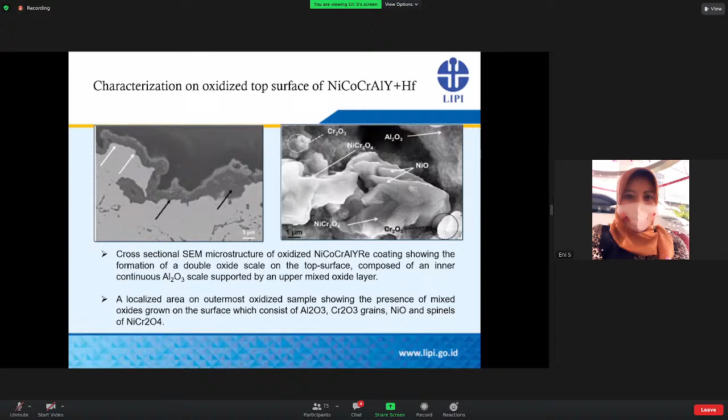I will summarize the results as follows. Nickel, cobalt, chromium, aluminum, yttria, and addition with hafnium bond coat having a high hardness value, the oxidation test coating applied on Hastelloy substrates has better oxidation behavior. The oxidation temperature at 1000 degrees C was appropriate for evaluating the bond coat layer against high temperature oxidation.

Based on the summary and to confirm the previous result for the bond coat layer, a further coating was also prepared with hafnium additions and compared with other reactive elements like cerium, as can be explained in this slide.

The cross-sectional structure before and after oxidation of nickel, chromium, aluminum bond coat with the reactive element is shown in these figures. It shows that the coating system thickness measures about 150 micrometers.

The improvement of the structure in the bond coat layer from the previous research could be recognized as more denser, less porous, and relatively smooth compared with the previous HVOF samples.

After the oxidations, the sample consists of 3 layers: secondary reaction zones, coating layer, and thermally grown oxide, which help to keep the other layer.

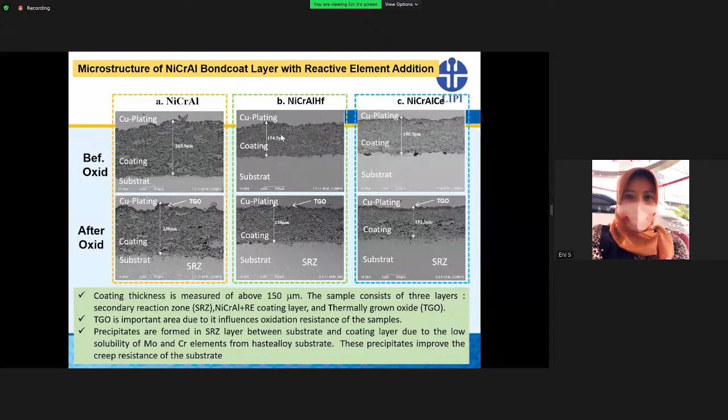On the contrary, in the nickel, chromium, aluminum with the cerium additions, alumina is evenly distributed on the top of the TGO layer. Thus, it seems to be more protected against high temperature oxidation.

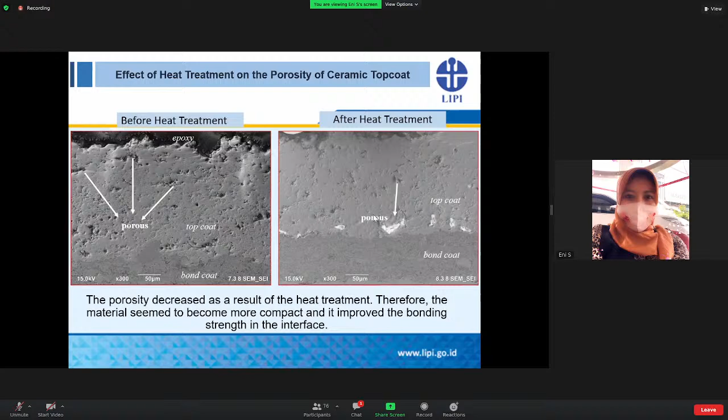This is the study to understand the effect of heat treatment on the porosity of the ceramic top coat. We tried to heat treat the sample at temperatures of 1100 degrees C. As you can see in these figures, the porosity decreased as a result of the heat treatment. Therefore, the material seems to be more compact and improves the bonding strength at the interface.

This figure shows the oxidation kinetics also for the TBC, which is complete with the bond coat and the ceramic top coat. All coating samples reveal a parabolic oxidation behavior.

The mass gain varies over the 100 hours, where the addition of cerium has the lowest mass gain, about 0.91 milligrams per centimeter square. So it is verified that nickel-chromium-aluminum with cerium shows a smaller increment in mass gain compared with the other 2 samples.

Therefore, the cerium addition is more effective for improvement of thermal cycling life.

This figure shows the cross-sectional structure of the coated sample before oxidation. The coating is composed of two layers: metallic bond coat and ceramic top coat. The coating layer was established at approximately

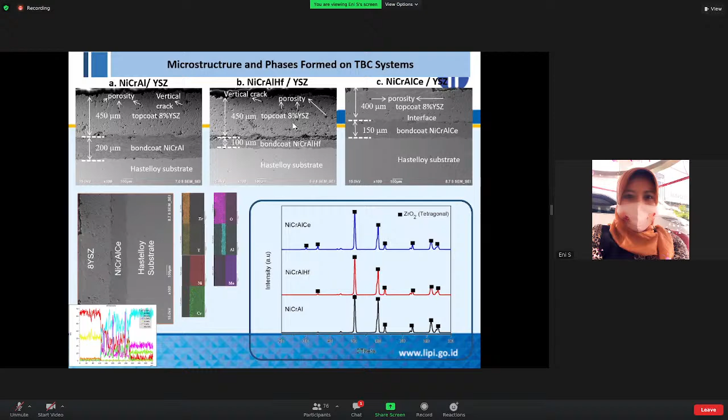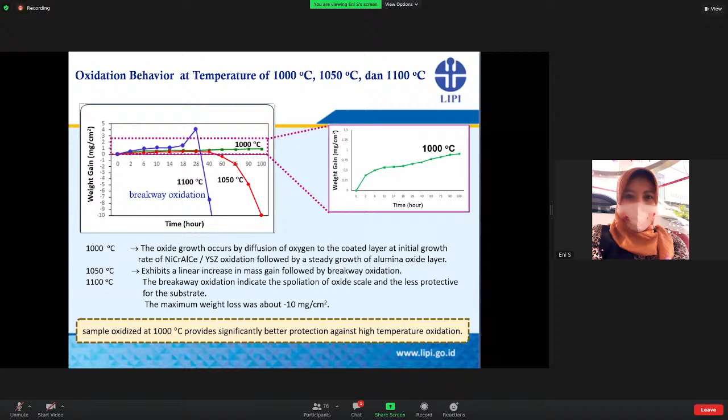So this is very important for the TGO characteristic of this TBC system. Furthermore, we also characterized with XRD and it shows that all the coating samples, even though the oxidation was carried out at different temperatures, show again that they are mainly composed of the tetragonal zirconium oxide phase.